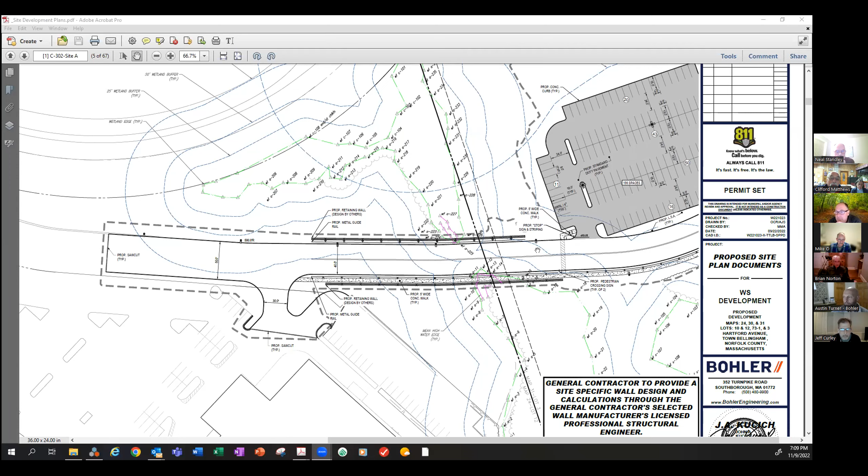I can zoom in and out here as we need to. We had a productive and insightful site visit, Cliff, as you were mentioning in the beginning. What I thought we would do is have you and the commission talk about your findings and observations, so we'll have a discussion amongst us, and then figure out what makes sense for appropriate next steps.

I know there was some alluding to a second site walk, which we should probably schedule this evening as well. I'd be happy to proceed however you want, Cliff, but if you wanted to take point and give the summary and have that conversation, or if you wanted me to give a brief overview of the path we collectively walked and then flip it to you, I'm happy either way. Well, I think what I'd like to do is recap and comment on the necessary identified points as we walk them, and present our findings, observations, and requests for additional information.

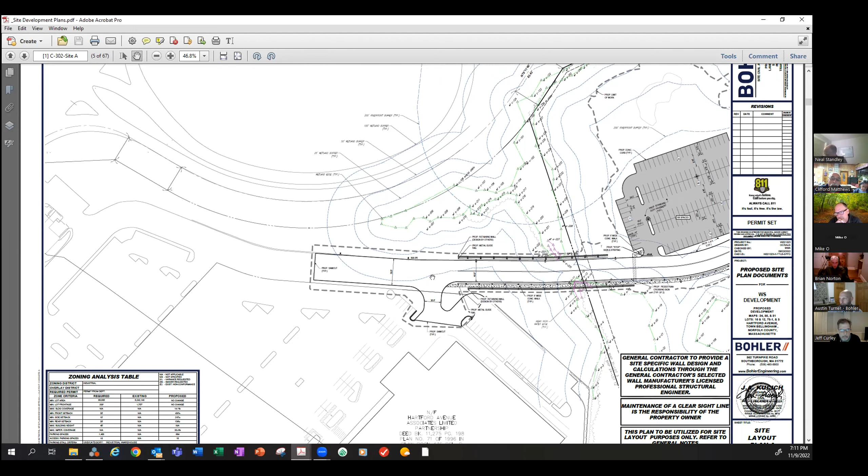So right where you are, that's the access directly behind Home Depot. We walk down the hill, and came to the crossing, and we reviewed the crossing area. There were some discussions in the field. The administrator got everybody together so we'd all be on the same page relative to the amount of fill that would be required there. In the immediate environs of the crossing, it appeared that the wetland delineation was appropriate.

One of the things we're going to ask for, and I know Andrea had mentioned, and I had mentioned in the field, is that the perennial nature of the stream happens somewhat to the east. I was going to ask if she had any identification of no flow during a period where there was no drought. So we're going to ask that you provide that, or wait until a point where we can review it, to make sure that we have the commencement of perennial versus intermittent identified properly.

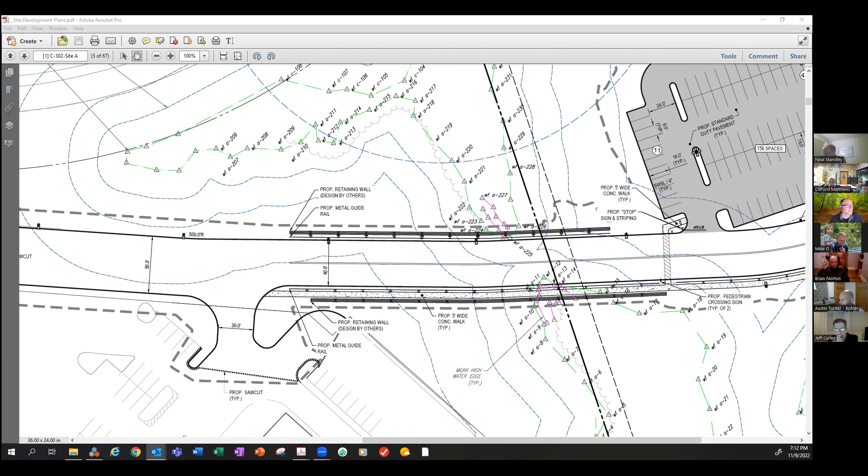So walking further to the east, and this is my mistake because I was really looking forward to getting into the building footprint, but we did not review what I believe is wetland X. There's a wetland, let's see, right in here. Unless I misidentified it. No, let's see, so this is wetland X right here. We did not review it. It's our intention to look at everything that's within 100 feet of any proposed activity on the site.

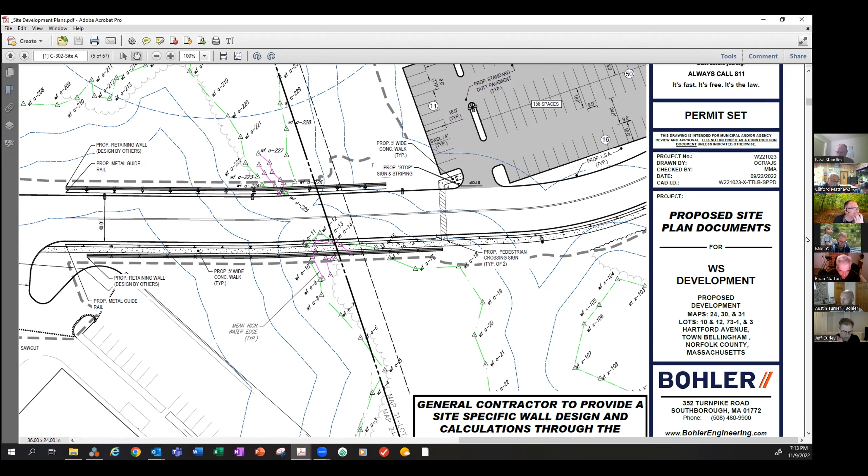I'm looking at, is that wetland A? No, there's wetland X. This is A, X is immediately adjacent to A. All right, so I see A. Yes, that's correct. We did not take a look at wetland X, so the next time we go out in the field we'll have to do that. But like I said, it appeared that in the immediate vicinity of the crossing, wetland A was accurate, and the banks appeared to be accurate as well. So wetland X is one we're going to have to review, any areas within 100 feet.

Moving on to wetland B, there was a small area, probably, and Andrea could correct me if I'm wrong, we're looking at potentially 3 flags where we asked them to be moved out 10 feet. It was right around wetland flags 11, 12, and 13 in that area, exactly. So that's an area that will be reflagged and re-identified on the plans.

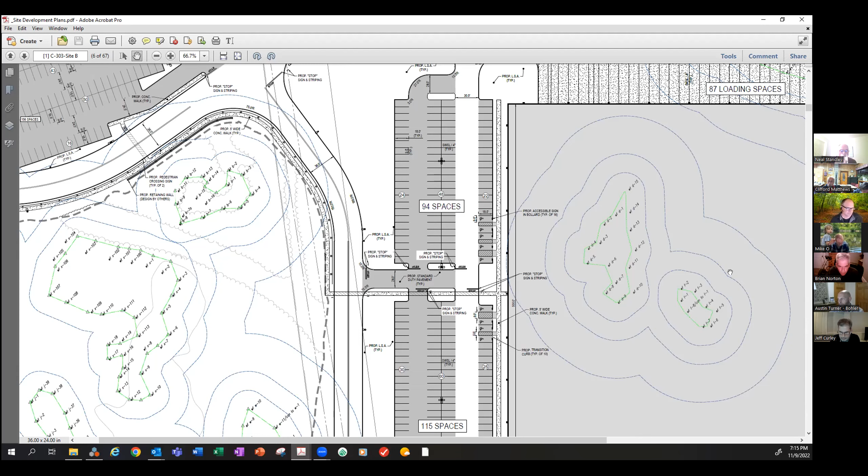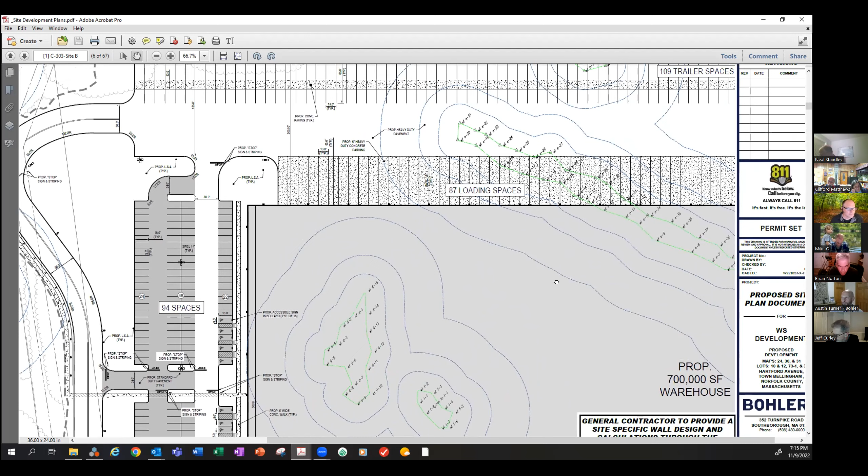Then we walked to the southeast, picking up a corner of the building that was identified in the field, and walked southeast to wetland D. We reviewed a portion of wetland D, then moved over to wetland F and reviewed that in its entirety, then finished wetland D and found the delineations to be accurate and acceptable. From that point, we moved to wetland E, a linear wetland between two fairly large embankments, and once again found it to be accurate.

At the southern end of that area was a vernal pool. If I'm not mistaken, that vernal pool was mentioned in the notice of intent filing as having a couple of egg masses, but not being viable. Under the local bylaw, evidence of breeding is reason to consider a depression, isolated or otherwise, to be a vernal pool. So we'll need to take a look at that one in the breeding season to determine exactly what the value of that is, as it was not called out as being a vernal pool, but rather dismissed as not being viable.

We talked in the field about the length of the hydro period, and it was short. We had exactly the same situation in a filing this spring going into summer, and the commission determined in that case that evidence of breeding, per our regulations, is the presence of egg masses. The presence of egg masses were noted, and a drought was declared for Norfolk County in May, resulting from three months of lower than normal rainfall. So we'll evaluate that, and if there are no egg masses, we'll concur with the findings in the notice of intent.

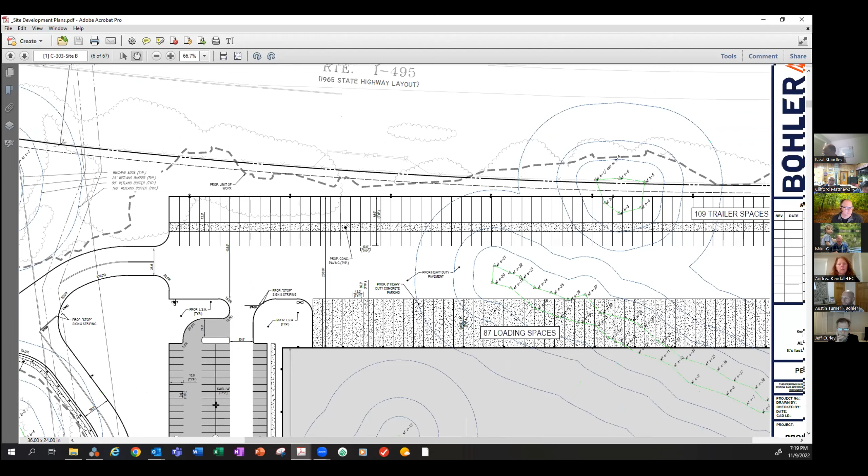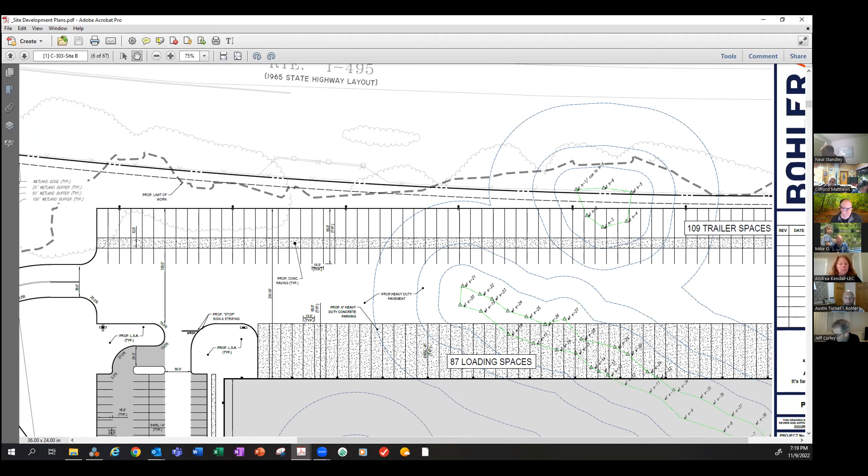From that point, we moved kind of to the northeast to what I believe is wetland H. Yeah, correct, that's the locally jurisdictional isolated system that spans the property boundary near the highway. Right near there was another limit of work benchmark. Yeah, I found that exhibit, highlighted for ease of review. Perfect, so this right here is H.

What we found was we were walking along, having staked out in the field that limit of work in a linear fashion on either side of it, so we could visualize how that looked. We found this point being L7 and this point being L8.

Okay, good. So we found the flagging for isolated wetland H was accurate, and then we continued to move in the northern direction and came to the area of the larger vernal pool that's part of a BVW associated with Springbrook. That's the place right there, and that's wetland C, I believe. Correct.

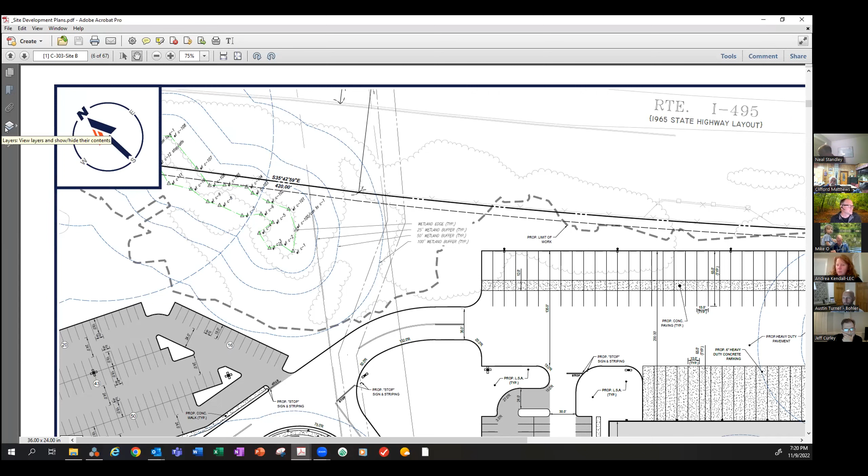This is also the area where vernal pool replication is proposed. So what we're looking at is just kind of the overall view of the replication plan. This is the area identified as being that vernal pool. This area in green is the proposed replication, or additional enhancement, if you will. We're not impacting the vernal pool, but we're going to extend that wetland.

What we were looking at out in the field is there's kind of a ridge, and what we were trying to avoid, and Matt had identified this in the field as well. We're trying to be respectful to the topography out there and not create something with a tremendous amount of cut or fill, but making sure it's hydraulically connected and respects some of those natural high spots and clusters of rocks that may be habitat providing.

What we had talked about, or at least my understanding of the conversation, was that we were going to look at the design of this a bit more closely with Matt, Andrea, and Brian at LEC to get a bit more granular as we go through this process.

I think that's important, because what the commission doesn't want to have happen is intrusions inside the 50-foot setback to a vernal pool, where we are actually altering upland terrain, which is habitat area, in an effort to expand the vernal pool. What we don't want to be doing is damaging habitat to the vernal pool species so that we get a net loss, because some of the habitat, maybe some of the critters, are destroyed during our effort to enhance. We'll rely on Matt on that.

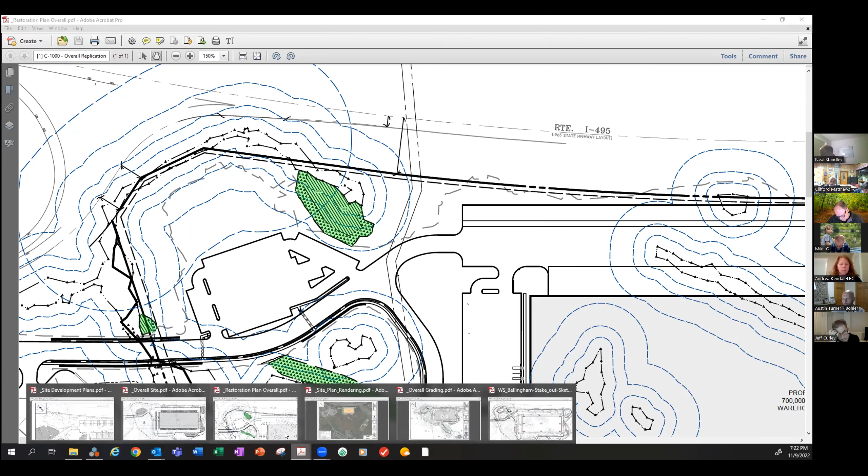And then the final thing, there were a couple of benchmarks that were missing for the area. So what we had done here, we have a surface stormwater basin located here. The area we're looking at for context is right here. And we walked along this wetland on the ridge line of that topography and inside the fence boundary.

What we're going to reestablish in the field are the stakes around this surface basin, and then provide some additional context for the replication areas.

Okay, so I think we got a lot of work done. I apologize to the commission because it was a little bit longer than I had anticipated, but I was driven by my personal desire to get that whole section of the project reviewed.

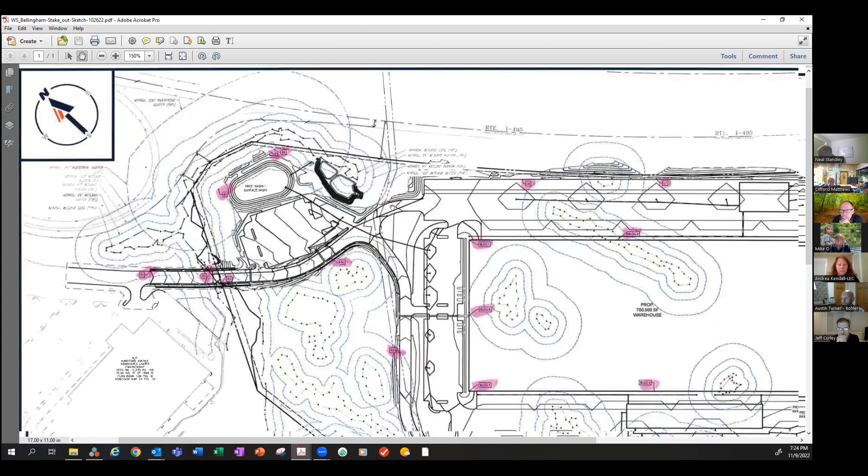Moving forward, I think what we're going to do is a similar situation, moving to the southwest of the site, where we'll do a similar kind of activity, walking along the access road. And now, Matt.

Austin, have you picked up those benchmarks? What do you mean by picked up the benchmarks? Well, this plan shows you have those benchmarks staked in the field. All of those are— Yeah, correct. So everything highlighted here in pink, that was established in the field prior to us walking the site last Saturday.

Perfect. And so the wetlands have also been flagged, renewed, and staked. Correct. So what we would expect to see out there as we advance into the site would be very similar to what we experienced when we were out there last weekend.

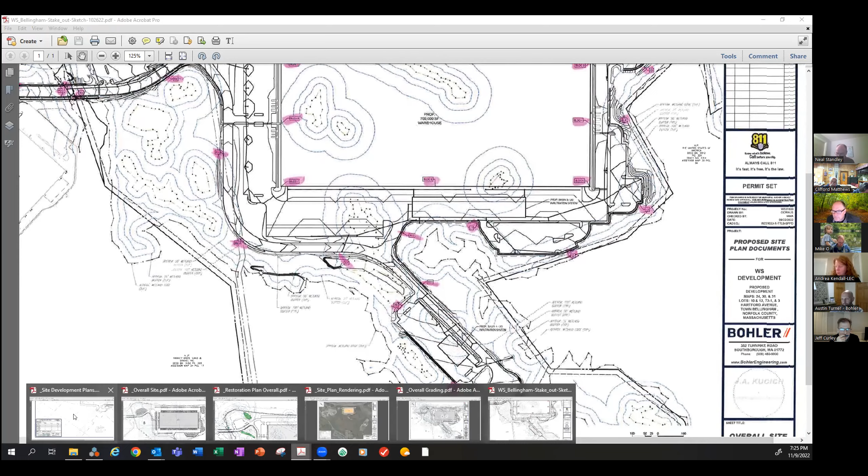Good. So one of the things I want to make sure is that as we proceed along the areas where the walls are going to be contained, I'd like you to stake out the walls, because even though there are going to be walls and the actual vernal pool itself may be protected, what we're going to be doing is segmenting the habitat areas. So for instance, along wetland N and maybe now wetland W—I don't think that's listed as a vernal pool.

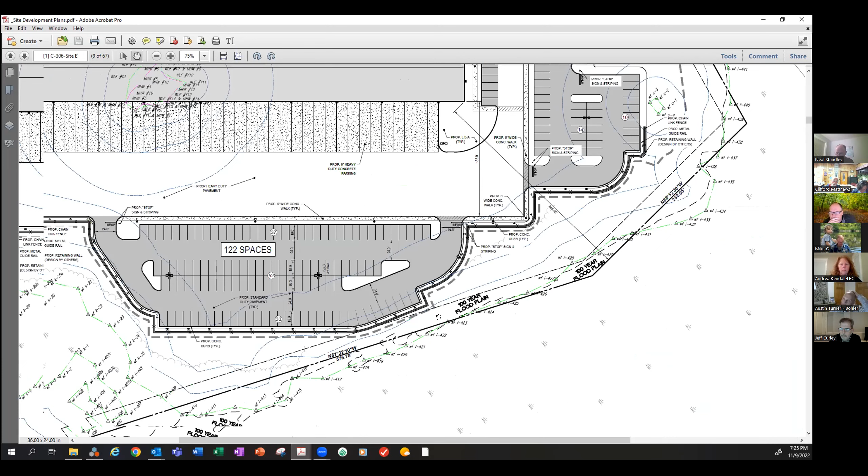Do you have W as a vernal pool? That would be this one right here. W. Yeah, okay. So wetland W is listed as a vernal pool, and you've got grading and what appears to be a wall there, and it's pretty close.

We'd like to see that area indicated in the field so we can find out exactly what we're talking about, just so I'm clear—and again, not questioning you, but just so I'm clear—we're talking about this wall here, right? Then we have this perimeter wall here.

Enlarge it a little bit more. Yeah, I'm working off 11 by 17, but—oh, there you go. Okay, yeah. So if you go back to the access road, please.

Now, the wetland area right next to stake number, location number 5 — R5, right here. Okay, that resource area there is W.

And according to the notice, that one is identified as a vernal pool in the NOI. So we need to know what the closest point of impact to that is. It looks like you're outside the 25-foot, but we'd like to see that in the field.

So establish this limit of grading in the field. And that's what we're going to do, Austin, as we go along, especially in the areas that are vernal pools. We want to make sure the animals using them for breeding purposes have ample opportunity for alternative habitat, because they're going to be losing the areas where the walls and grading occur.

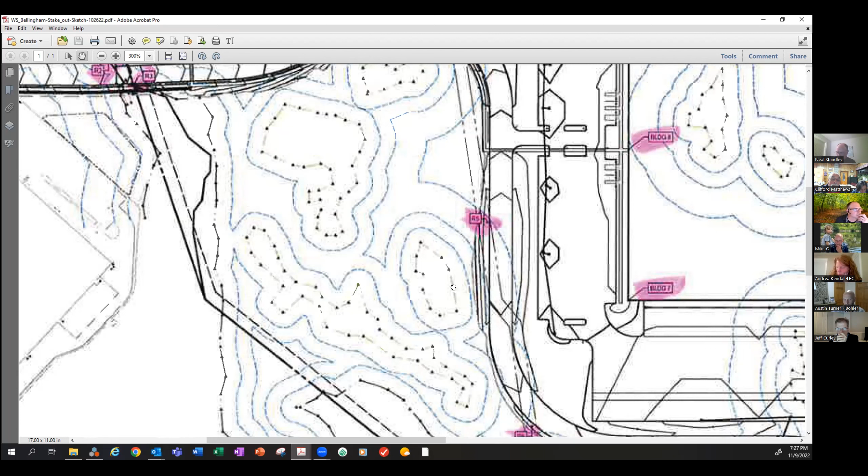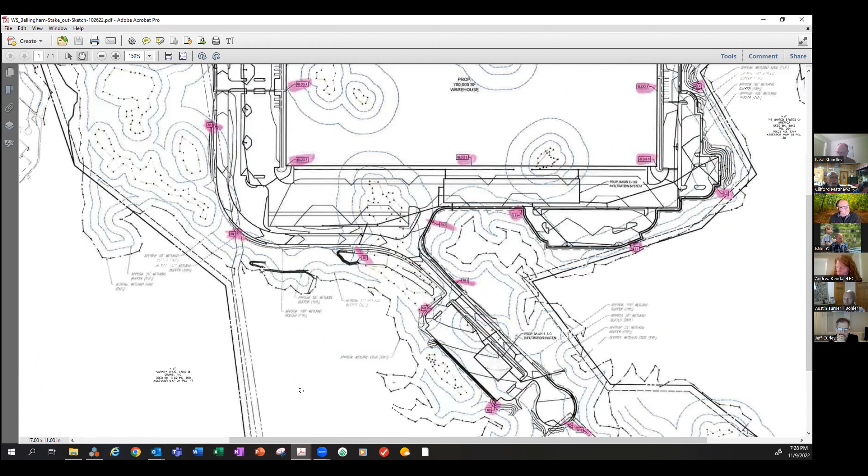Understood. So there's wetland W, and of course for wetland J, which is immediately southwest of wetland W, we'll look at the areas within 100 feet.

That one, Austin, is a little — I think J, I can find it right here. It's at the 90-degree turn there, Austin, top of page, there you go. That's J, right there.

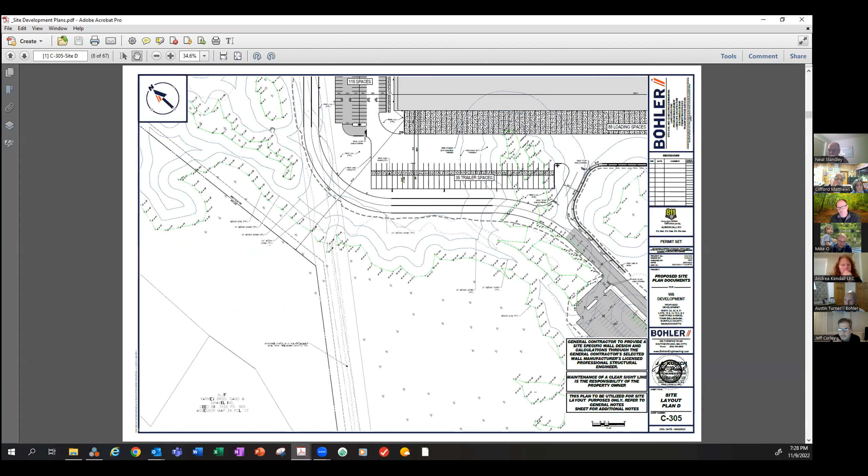And it'll be the same thing there — we'll look at the closest point within 100 feet. And then as we move closer to the southwestern corner of the building, where we impact wetland G and wetland N, we'll be looking at similar things.

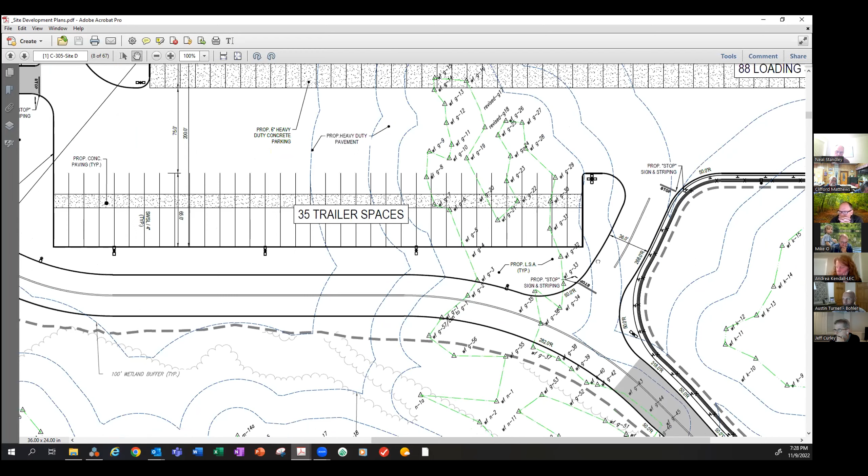Wetland G is proposed for fill. We'll review the flags in the field to make sure they're accurate.

Wetland N is a vernal pool, and you're crossing between G and N. We know N is a vernal pool because it's been identified in accordance with Wetlands Protection Bylaw regs for our previous filing.

I think in the field we'll talk to Andrea relative to the findings for wetland G, to make sure that no vernal pool life has been identified.

And if we get to the point where we want to look at, as we previously mentioned, wetland E in the spring, we'll also take a look at wetland G.

In the past we've looked at it, and it appears there was a hydrological connection during high water across that cart path, and we've seen tadpoles in the cart path. Whether or not they make it into wetland G, we never really determined.

So we'll talk to your environmental consultants in the field and question them on their findings.

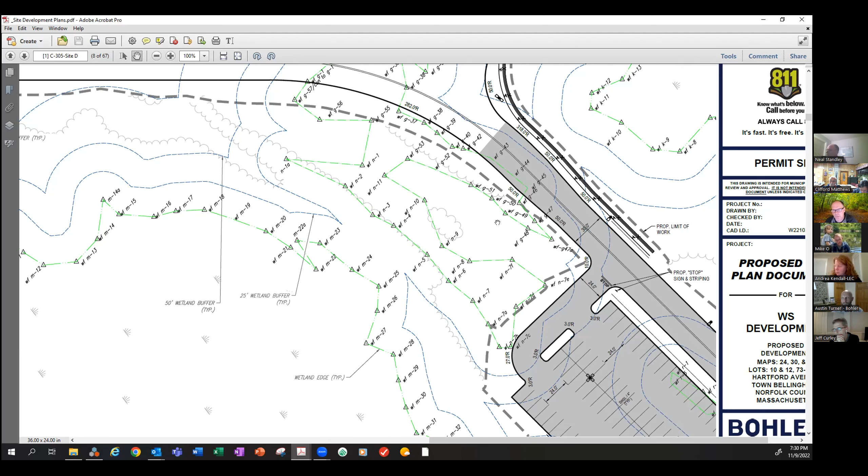And as we move closer to the parking area to the south, wetland Q — we know that's a really active vernal pool — we'll ask for the same thing. It looks like you're very close to that.

That one may require modification. You're actually up to the 25-foot no-disturb zone. But again, we'll take a look at these things in the field.

Now, we have not looked at wetland Y yet, but I think what we want to do — Austin, I think you alluded to this earlier — there's going to be walls along the southwestern portion of the building, so we'll take a look at that wetland. I don't have an identification on it, but it's associated with the Charles, I believe.

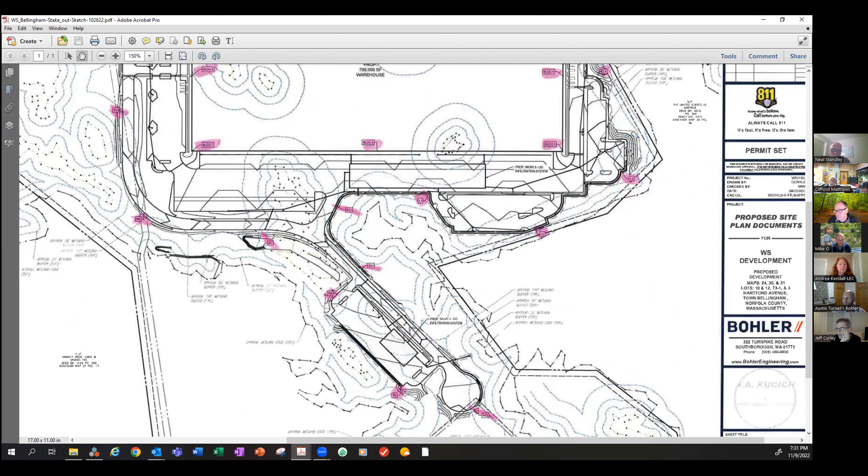This one here, yeah, that's the one you're referring to. It's actually K, Austin — to your left. Okay, K, correct. Yeah, K bleeds into I.

So, we have some more work to do, but we got off to a good start. I think your team knows what we're looking for and how we're going to work on it.

Before we look at scheduling another site walk, I asked you about the possibility of providing us with that plan. That doesn't seem to be a problem. Just going to ask for a couple of status updates — you're going to have a filing with MEPA.

Okay, perfect. And then the other thing is, do you cross thresholds for 401? You might because of the amount. Yep, so we're anticipating doing that. We're still working out if we're actually crossing those thresholds, but we're going to be preparing one of those is our expectation.

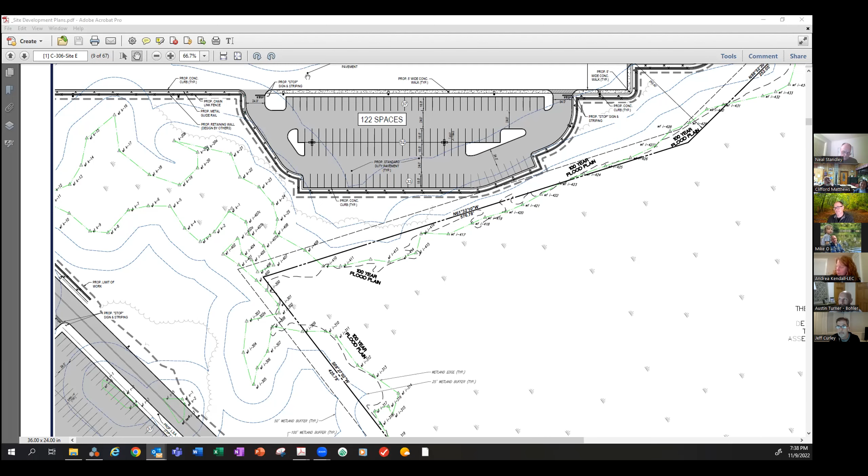Yeah, well, so I'm gonna ask the commission, what do we have for availability for another review? And I'll rein in my enthusiasm to keep it to a couple of hours - I got a little carried away.

December 3rd, he'd probably still be out there, alone. Yeah, okay, I'm available 3rd or 10th. I'll have to get back to you. I may have some holiday concert conflicts. I know I'm personally not available on the 10th, I'm traveling. Not that my schedule should commandeer everybody's, but that's it.

Okay. Ariane, I think I can do the 3rd. Third? She broke up. Matt, did she say the 3rd? I think she said the 3rd. I could do the 3rd as well. Oh sorry, starting. Can you hear me okay? Yes, okay, this is looking good.

So wait, what about Ryan? Ryan, yeah, I should be able to. Well, we don't want you to overdo it. But I won't do that. Who else? No. Maybe we'll let Noel advise. The 3rd is okay with me. That works, okay, this is looking good.

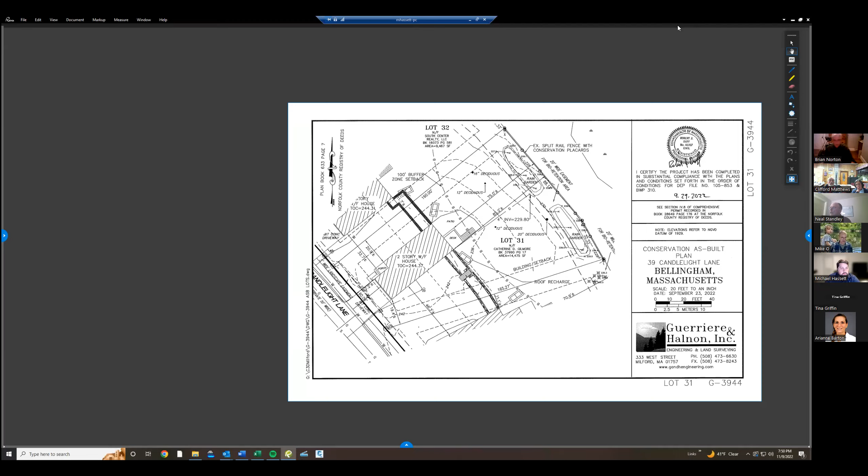Yeah sure, Michael, why don't you put the plan up? Sure. Let me share my screen. Noel will let you share your screen, I think. There we go, okay, here's the screen.

All right, so this is lot 31. They built the house. Most of the work is at the house, the patio deck, retaining walls—all of that is outside the 100-foot buffer. The wetlands are located in the back. The two rain gardens are constructed, and this whole area is grass. They have the split rail fence with conservation placards along the rear lot line. And that's it. It's your standard house with backyard.

Okay, so there were a couple of questions about this because the original filing showed grading and not retaining walls. We had a couple of situations where there was silt transport between this house and the abutting house, and to solve the problem, the developer put in walls rather than grading. It was outside the buffer zone. There were several trees in the backyard, one had died, two were leaning precariously toward the house. Those trees were removed. We were there today to inspect.

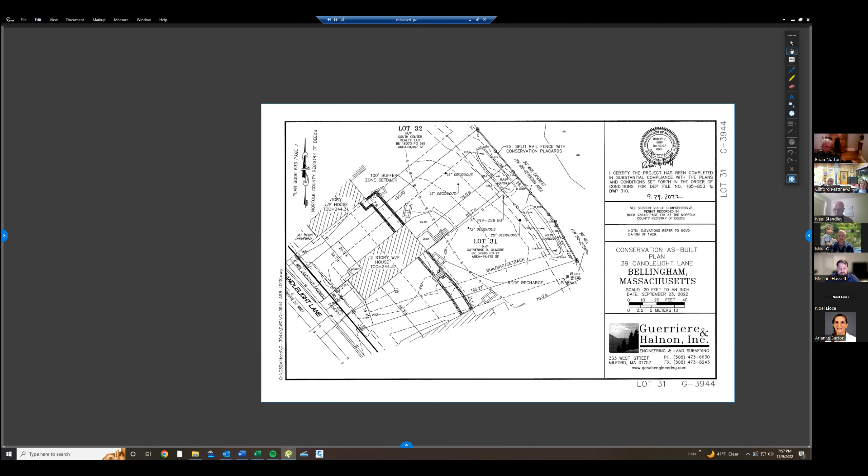Thank you, we have one set of minutes to approve, September 28th. I know they've been distributed, they showed up in my email. I think Mike had one small comment, Mike, on the minutes, September 28th.

Mr. Chairman, what was the proposed date of the site walk? December 3rd. Thank you.

Same time, same place. The place hasn't moved, huh? No, it hasn't moved at all. Someplace less wet? Just saying, I think it's doubtful we'll have weather as spectacular as we had at our last site inspection. But hopefully it's not pouring rain and 20 degrees. Those are tough ones.

So, Mr. Chair, in answer to your question, on page 3 of the minutes under the RDA meeting, 89 Lakeshore Drive, there's just a little typo. Second full paragraph, last sentence, I believe it should be 'I'm proposing 3 sonotubes' instead of 'I apostrophe'.